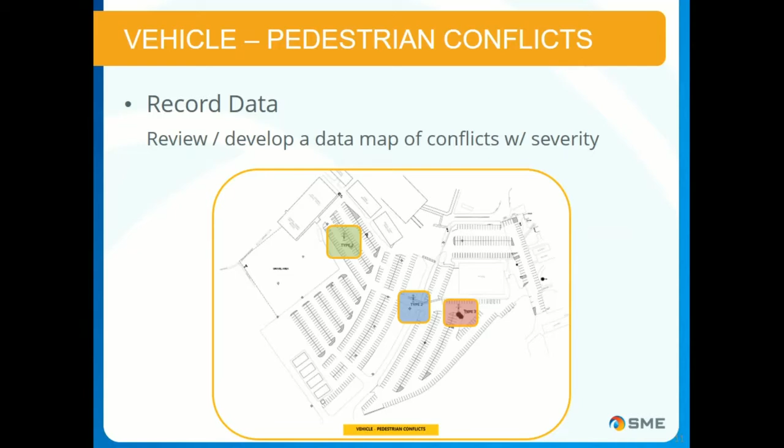So this is a map of a previous facility we worked on. You may recognize it - please don't shout out what it is or that it's yours. But this is where we're keeping records and trying to help our clients make improvements. In this particular map, we've documented what each one of these issues were, gave it a color coding, and given it a type. Then this is referenced back to the database. So this is just one simple method.

Here's another one where you might have just a Google Earth image, and you could create a KMZ file with tags, and start mapping your information through KMZ files. You could give it color coding - you probably cannot see it, but within this particular map we have identified letters that link back to our database, so we know exactly what the incident was, what type of incident it was, and the color coding relates to how severe it was.

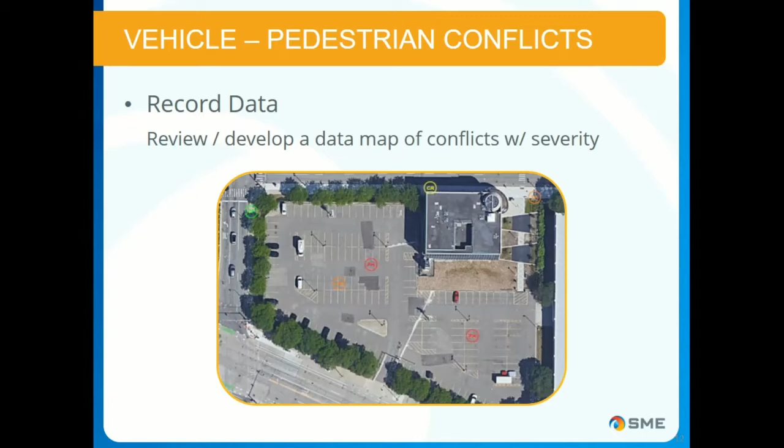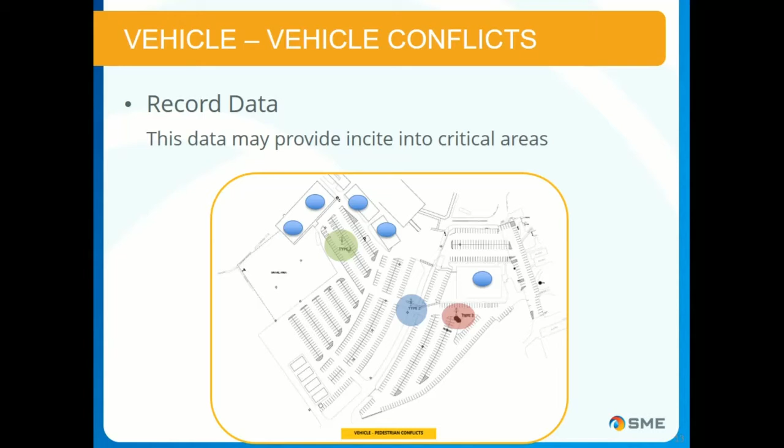Vehicle conflicts. Not everything in a parking lot is just a vehicle and a pedestrian - sometimes you can have vehicle incidents. So there's another way you can start looking at overall vehicle movement in relation to parking stalls and buildings, and you can develop your own database figuring out where you're having conflicts, which leads into our next step: evaluating what the issues are once you have a database going.

Parking capacity. Right now you may look at your parking lot and say, well geez, it's pretty lightly parked - we only have about 45% capacity. But before COVID, parking capacities were probably nearly full, everybody was working, everybody was in the office. You'd be surprised that having too few parking stalls can actually cause a little bit of stress.

Think of yourself going to a doctor's office before COVID, driving around the parking lot looking for an appropriate stall, and what you don't find is anything that's near, and all of a sudden your eyes are wandering looking for parking stalls. That can cause a little bit of a problem.

You might want to look at your stall layout, 90-degree versus angle parking. Aisle width - if you get your aisles too tight, people walking down them will have cars getting closer. Get them too wide, you might find your cars are driving too fast. So there's some sweet points there.

Clear vision areas for turns, lots of congested facilities, trees on islands which many of your municipalities mandate. As the trees or bushes get more mature, they can start obstructing your vision, or you find you have to pull too far out into the intersection to see around it, and now the nose of your vehicle is out in a drive lane. That could cause a conflict.

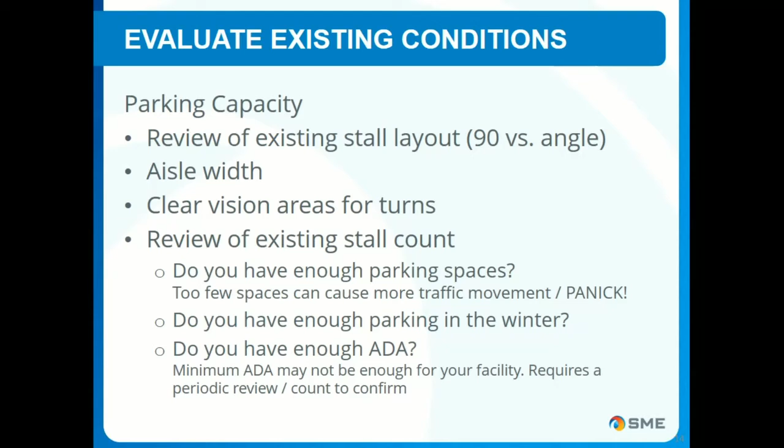Here's one that I really think is a great idea: a hands-on review of your pedestrian routes. You should go out at the prime time of your facilities, drive in, park with the rest of your team members in their lots, visit and try to look at every lot - are there lots of cars waiting to turn in?

Are there lots of cars waiting to get into a stall? Is it a mad dash rush around your facility trying to find a parking stall so you can get in, be on time, meet your appointment, be at your next meeting? Do you have proper lighting - dark spots, light spots? ADA barrier-free parking counts versus needs - I really think that's an important thing to do. Just because you meet the minimum standard doesn't mean you've got the right number.

Access points to the parking lot versus parking lot location, as well as what does the route from the parking stalls to your building look like? Is it appropriate? Is it well documented? Is it guided? Do I know as a new visitor to your facility how to get to the right point of the building? So we'll talk a little bit more about that.

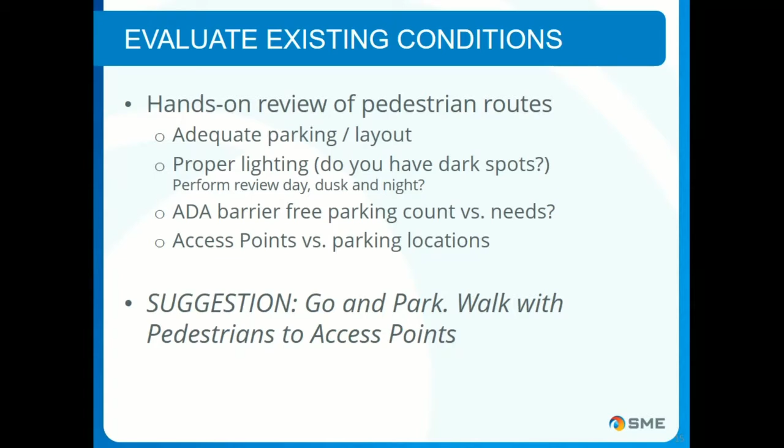Go and walk, park, walk and talk with the pedestrians who are going in. Figure out what they see, what are their thoughts. Wayfinding, signing, and striping.

This is probably two of the more lower hanging fruit that we can take care of to clean up, make sure it's appropriate, well planned, visible, not confusing, and provides proper guidance from a building to a parking lot to a building, even within a facility. Does the signage tell me where I need to go?

Evaluation of condition and visibility is a must do each and every year. In Michigan, we have a lot of breakdown and wear of our striping, so you need to understand that your striping is going to need to be redone.

You might have to put another coat down every couple of years. Even with that, you might have to realign or redo some of your striping. So this is the right time to do it: have a schedule of when striping is going to occur, back yourself up six months from there, and walk it to understand what is going on in your parking lots.

Do I have correct pedestrian routes identified? Do I have any pedestrian routes identified? Am I just letting my folks wing it and figure out how to get from point A to point B on their own? This is also the time, as you're working on this, to ask what are the known conflict points. Go back and re-review your reports, re-review your drawings. Do I need to add stop bars, stop signs?

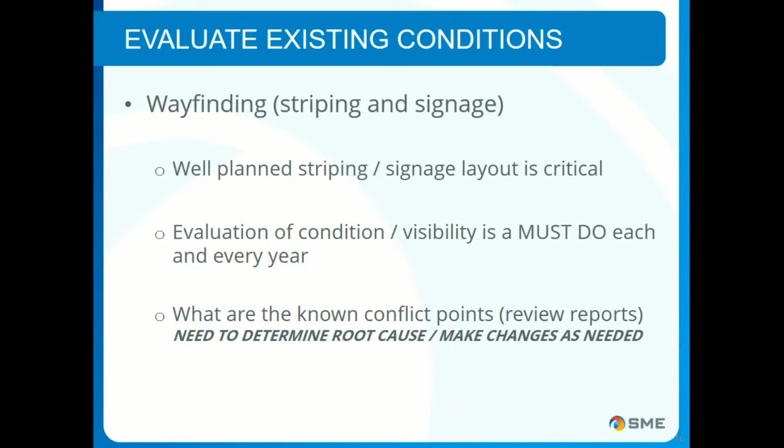So with signing and striping, we're going to take a quick peek and go through a good or just so-so scenario.

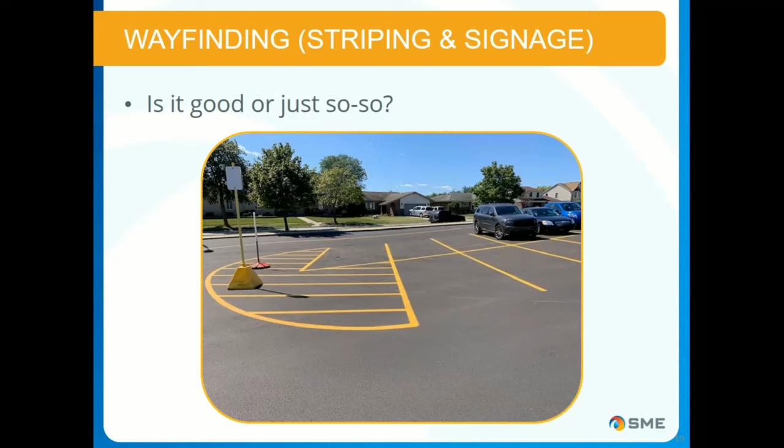Good or just so-so? The striping here is a little bit worn, but probably more concerning is down in the lower left-hand corner where you see that angled striping coming up - that's actually a pedestrian route. So right now in this facility, this pedestrian route has stopped. Now you can see there's some new paving going on in the background, so it's supposed to continue. But between the time that paving was done and when this picture was taken, I've brought my pedestrians to a standstill, and now they are maybe looking at this saying, I don't know which way to go.

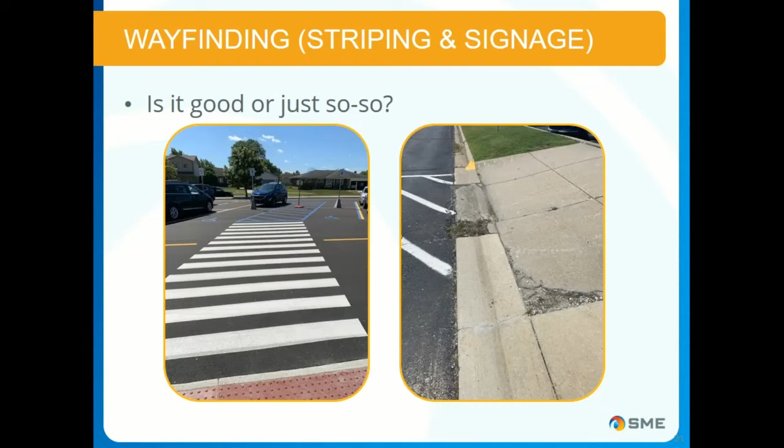In this scenario, I'm basically asking my pedestrians to walk across the road in a designated location, and I'm bringing them to a trip point or hazard. Something else that's hard to see here is that there's a very steep ramp as you get into the sidewalk, with a curb on the other side that dead ends into a parking stall. My pedestrians have to come across the roadway, get across that curb and gutter, turn right, come parallel with the roadway, then turn left again where that corner deterioration is. This is a little more cumbersome area to traverse for your pedestrians.

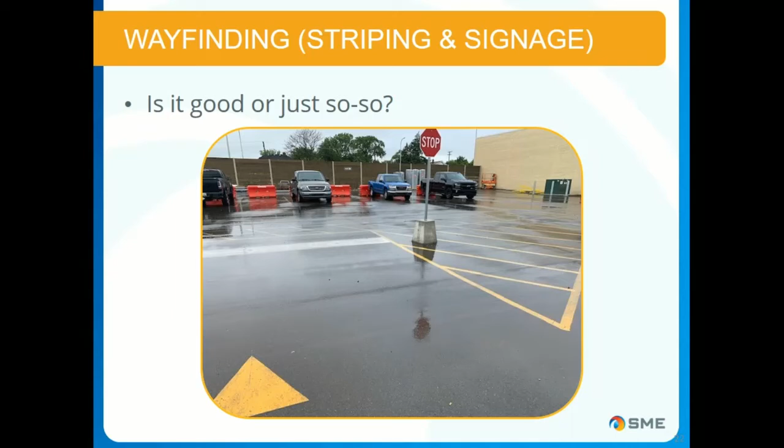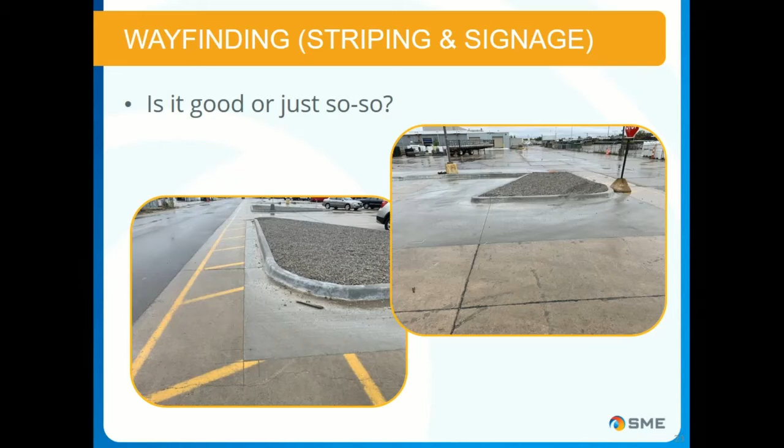Good or just so-so? Well, you can see that there used to be an identified pedestrian route, but there were some improvements made here that have cut off the pedestrian striping. So in this scenario, it's just so-so. This pedestrian striping needs to be redone. You can see that islands have been put in there to basically designate parking. We've got stop signs, however in the upper right-hand corner the stop sign is actually in the pedestrian walkway, so that needs to be relocated out of the pedestrian walkway.

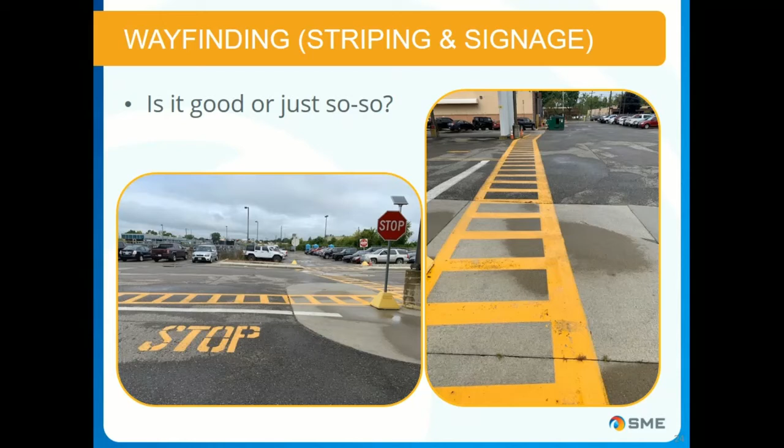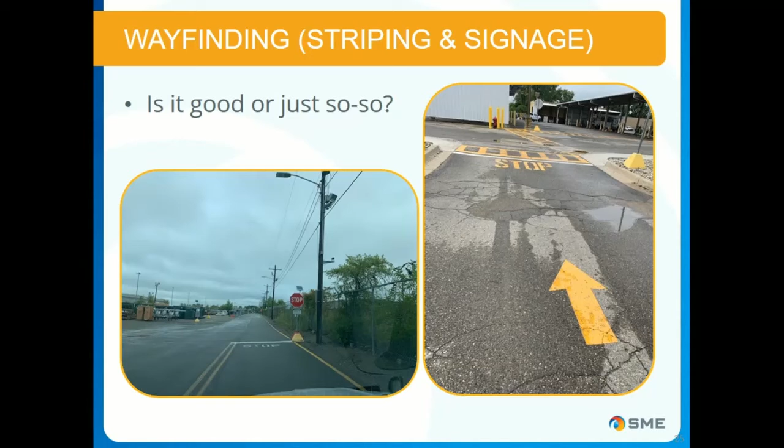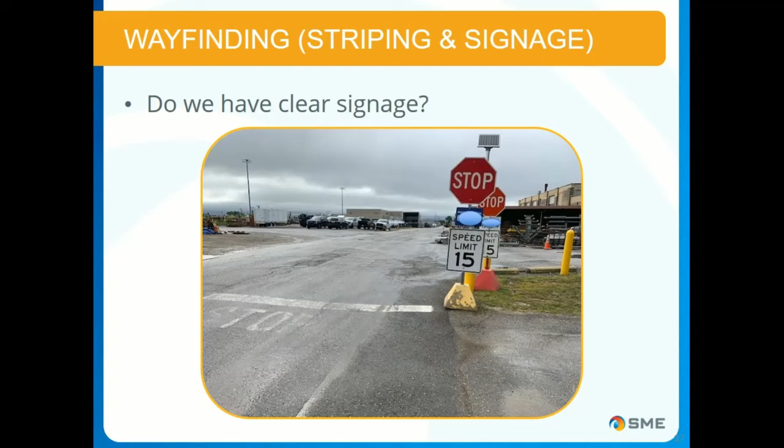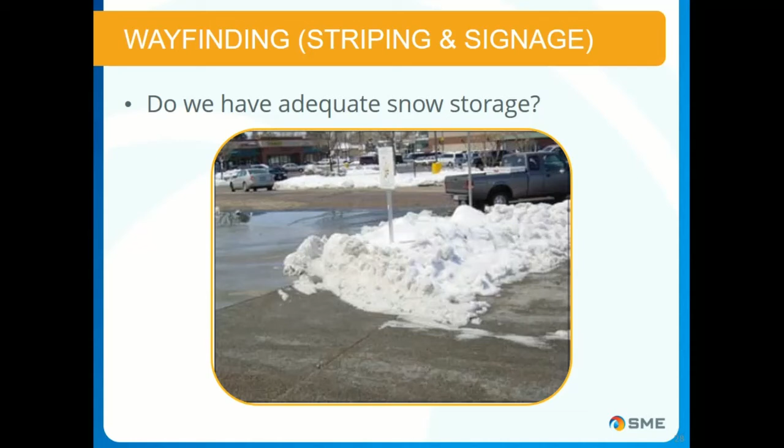Site lighting. In Michigan, we do find ourselves coming to work in the morning and it's dark, and when we go home at night it's dark. We need to know if our site lighting on site is appropriate for the facilities we have.

Do you know what levels you currently have? Are they in compliance? Do you have industry standards for your facility? And if you do, what are they? And is it in compliance?

You can consult the Illuminating Engineering Society for current standards. Contact a local MEP engineering firm or a supplier. They'll provide a study for you of your current conditions.

Perform your own self-review. Here's an easy one. Drive around your facilities, turn off your headlights if you can, and just see if you can find dark and bright zones.

You might say to yourself, well, a bright zone's not a big deal. But if any of you have driven on roads with a tunnel, you come out of bright sunshine into a dark condition, then go back out to bright, and your eyes have a hard time readjusting. That couple seconds of your eyesight readjusting from dark to light to dark can actually impede how you're viewing the space in front of you in your vehicle.

So definitely want to look at that. Consult with your security division. Do they have known issues? Do they have known locations where they know they have dark spots - I don't know if I'd use the word unsafe, but areas that they say people shouldn't park in at night, or they need to be careful of.

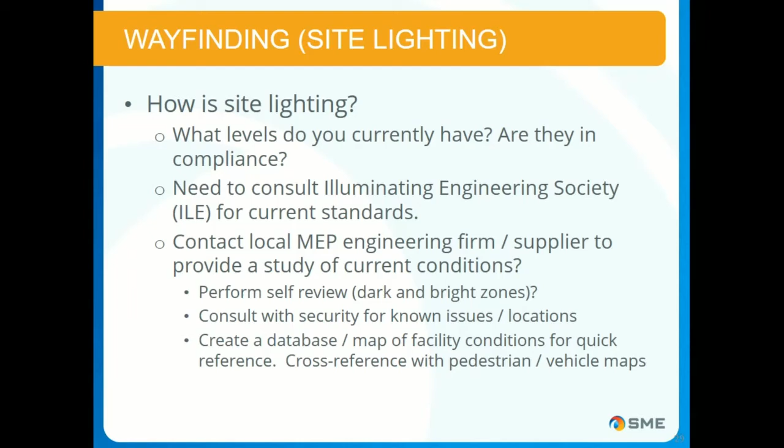Again, site lighting - this would just be a snapshot of a photometric plan. Your MEP contractors and manufacturers, with the right information, can do these on a computer model and generate for you what your actual lumens are for your parking lot, giving you a photometric plan. Mathematically, that'll tell you where you're at. But that's mathematically - maybe some of the fixtures aren't performing as well as they would mathematically.

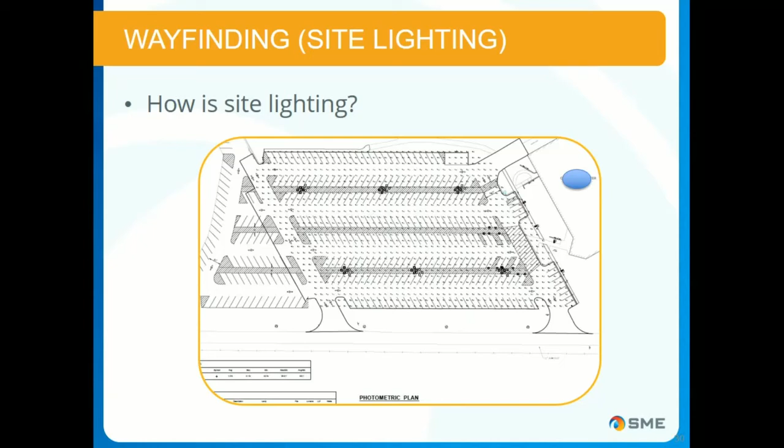Maybe some of the fixtures are 20 years old. So again, I would tell you, go out, walk the facility, know what it looks like. If all the folks are parking in the middle two aisles here and walking up to the building, that's probably fine. But how about the periphery? Do the periphery parkers have adequate lighting to get to where they're going? If you walk and drive it, you may know what is working well.

So it's something that you don't have to do yourself. You just have to identify it and decide where you want to do it, and have somebody else install it as part of a program.

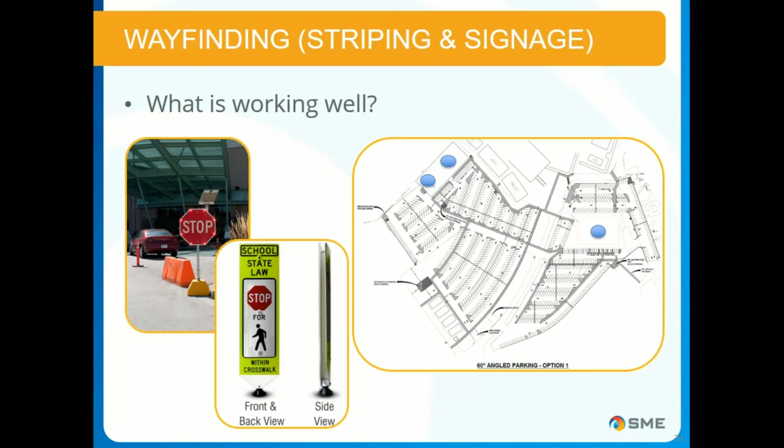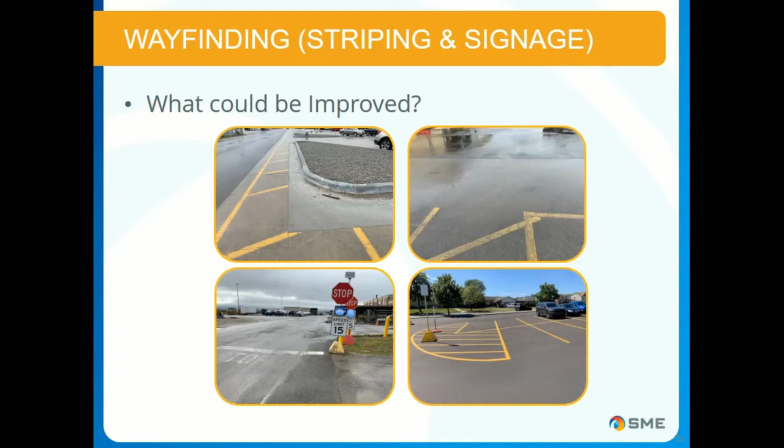I may consider, there's a sign with a concrete pedestal that's in the painted out area, maybe just moving that a little bit more interior to that island so that when somebody comes around that corner, they don't catch it with their car or their tire.

Additional resources. We all have a finite amount of time that we can deal with this, plus everything else that's on our schedule. So how about some suggestion box? Do you have any in place around your facility? Put a few around, and maybe make one of the items: what could we improve?

Put a line item in there that says parking, wayfinding, signs, lighting, more ADA. Through your process and your own review, you should have 3 or 4 tick items that you say these need to be done, or we should at least look at it further.

Review social media about your facility. People aren't hesitant about lambasting you on social media. If you got something wrong, they're going to get after you. So be the one who's actively looking for that and respond to them. Ask them for further input. People might feel pretty engaged if they feel like there's been a problem and you ask them to help.

Your security group is always a valued resource. They know what's going on probably as much or more than anybody. Query the pedestrians, query the drivers. Buses and shuttles - there are some facilities where there's just not adequate parking, and putting up a 4-floor parking deck to replace a flat lot is really not an option. It could come to the point where you have to put in buses and shuttle stops to bring people from an off-site location to your facility.

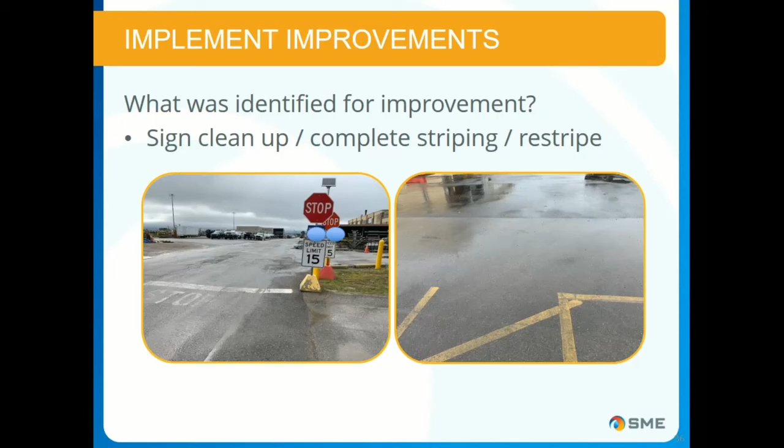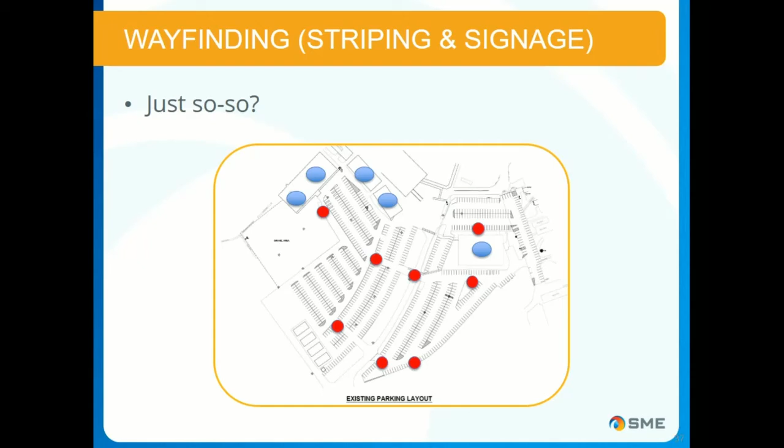We did a large infrastructure project at this facility. What a great time to now expand on the parking and striping layout plan for this facility - identifying things to make it safer, slow the vehicles down, and help the pedestrians know where they're going. You'll notice there are parking stalls everywhere here, so wherever you park, you have pretty good access to the building you're going to. Why is that important?

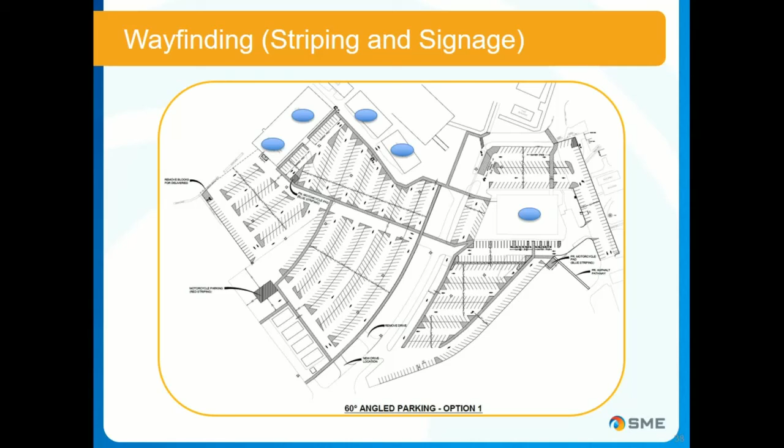We talked a little bit about it earlier - if I'm arriving at a site late or in a hurry, or on my phone, which I shouldn't be, and I'm looking for stalls two rows over, I'm not likely looking right in front of me where a pedestrian's popping out from between two cars, because they're also late to a meeting and boogieing along. So more parking, adequate parking, signage, and striping all help.

Are the routes to the building clearly marked? Once my pedestrians are in the lot, do they know how to get where they need to go? Well, once you put down the striping for pedestrian ways, they're going to know exactly where they need to go. Maybe even include some signs that say one way, so vehicles are only going one direction, they're looking for pedestrians, and they know which way they're going. It kind of breeds a point of being familiar with the site.

Here's another great idea we haven't talked about: as the facility manager, you understand your facilities, you live and breathe them. Is there something that you find works? We'll talk a little bit about that - about implementation management - try to drive that between facilities. What you'll have is some redundancy, or some general items that are consistent facility to facility to facility. And as your team members and people accessing your facilities start to see this, they understand what is expected of them.

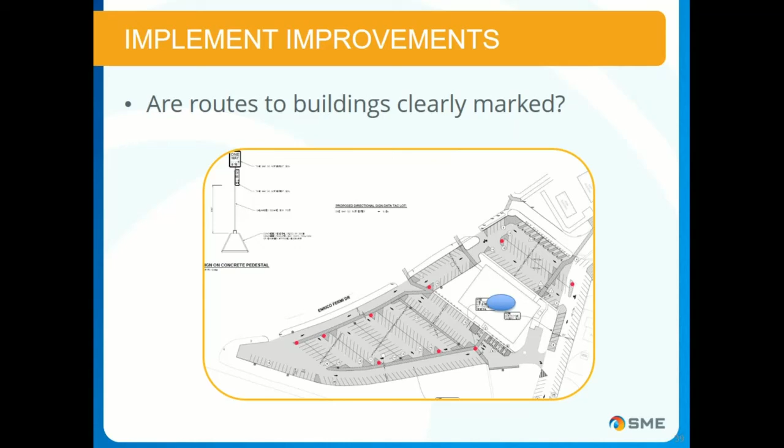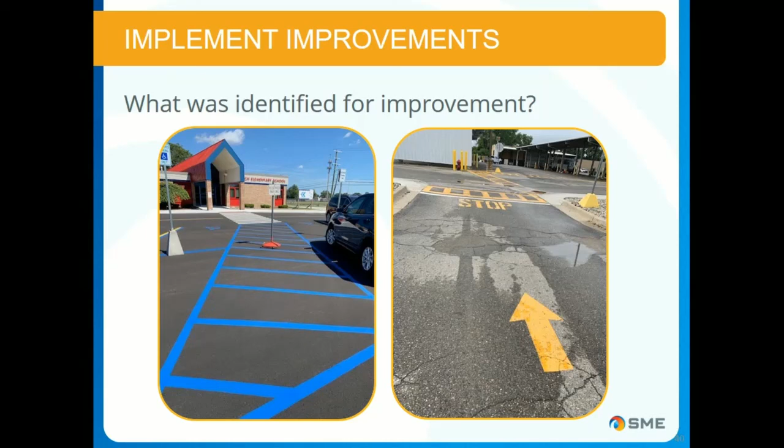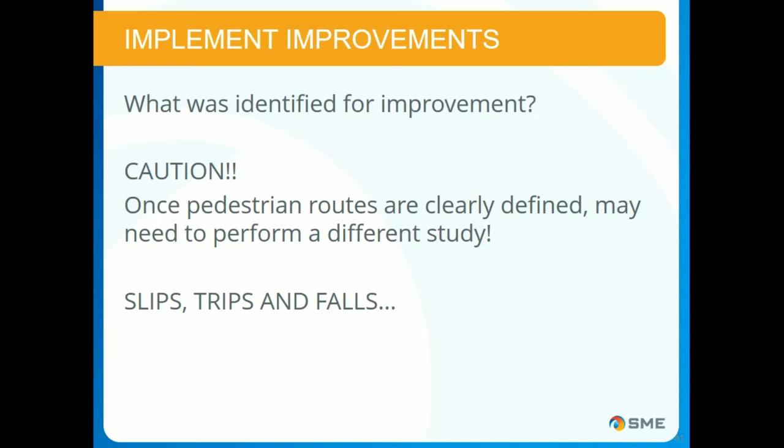A cautionary tale: by having pedestrian routes clearly defined, you may need to perform a different study called slips, trips, and falls. Because once you tell everybody this is where we expect you to walk, you also have to make sure that route is safe. Now, that said, your entire parking lot has to be safe. I'm not saying it doesn't, but if you put them in a designated area, that better be spot on. So that's a completely different topic, and maybe a future web series.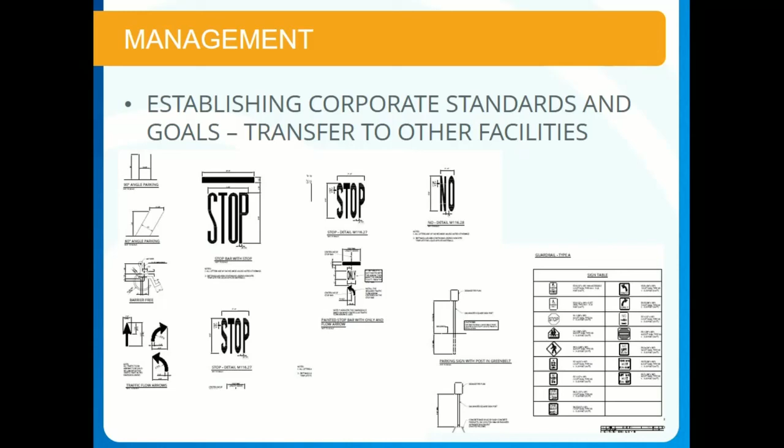Again, management. As a corporate, you could start establishing corporate guidelines, details, standards, and goals, and start establishing what each facility is going to look like. You could drive that through all your facilities, both at a single time and through history, then make improvements. You generate what you want your facility to look like, take that across all your facilities, and people will start to understand and change their behavior, understanding what your goals are. You've given tools for the facility managers to implement this, so they're not trying to reinvent the wheel. They're using a wheel that's already rolling, and they just divert that wheel over here and get going.

Slips, trips, and falls. That's a larger identification process and management, and it's a different program. We're not going to get into that today, but maybe I'll talk with Kristen and see if that couldn't be a future web series, because that's a different animal. Once you start down that path, you have a different set of criteria you need to use, different constituents you have to satisfy. So that's a little different program.

Maybe you walked away from this and said, we do all that, we're on it, we're spot on. In fact, we do more—we've got photos that represent good condition, bad condition, and we transfer that. That's fantastic. Figure out a way to make that a long-term vision and drive it across all your facilities. Some of you might say, I might try the evaluation thing, just drive around, walk around, look at things and see how they look. That's a great start. Anything—the phrase I use is just start. Pick one thing and start. Go make some notes. Drive your parking lots and go, striping looks great, or striping could use a redo. When's our next striping contract coming up?